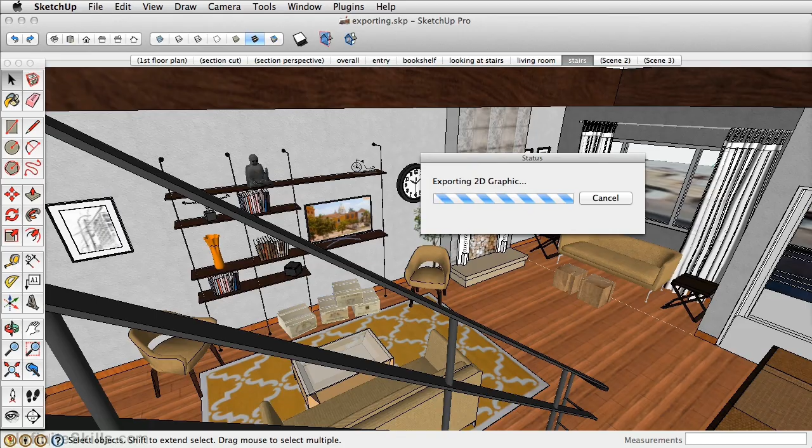The other way that you can export images is by exporting out as a PNG. So instead of JPEG, select PNG and go to Options. This gives you the ability to save out the background as a transparent element. So in Photoshop, this would give the alpha transparency so that you don't have to delete that white fill that you would see in most cases of the background of the image here. Let's just call this front of house.

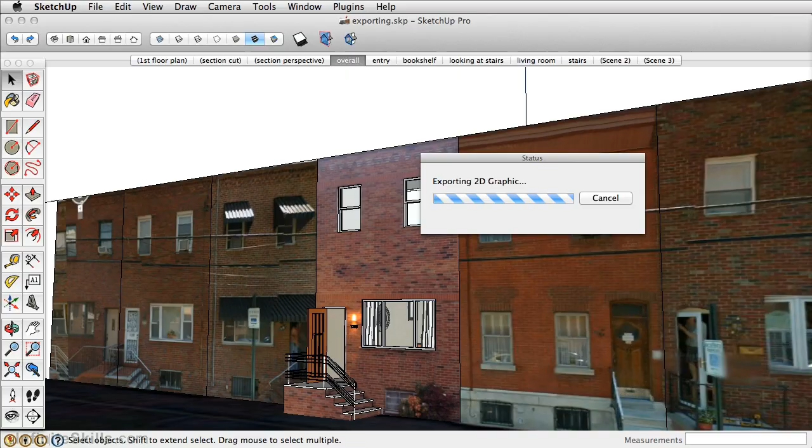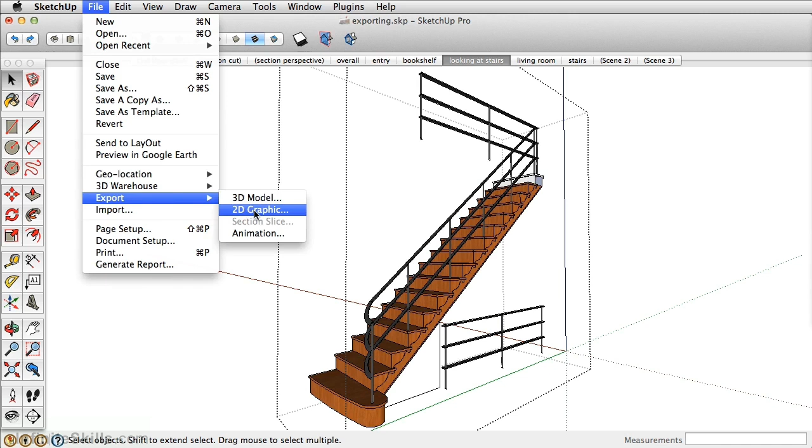One last trick when you're exporting JPEGs. Click on the scene to look at the stairs. And let's double click on our staircase. Now let's say you just want to export the staircase and notice we have Hide Rest of Model activated. Go to File, Export, and save this as an image. Let's call this staircase.

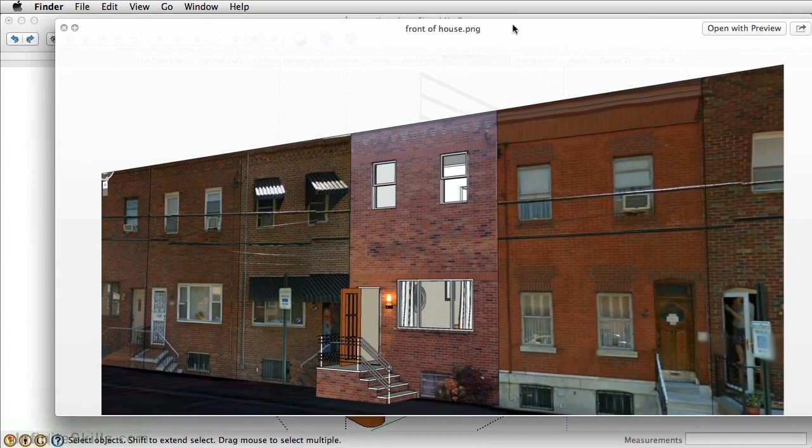So let's take a look at the images in our Finder. So here we have rendering 1. We have the front of house PNG. And you can actually see that alpha transparency because you can see SketchUp running behind the image. And then lastly, just the staircase.

So this is great if you ever just want to call attention to this detail, or if you're creating a composite montage kind of rendering, you can import this in as a separate object in Photoshop and then overlay your different elements. That's pretty much it for exporting images. Let's move on and show you some other exporting options.

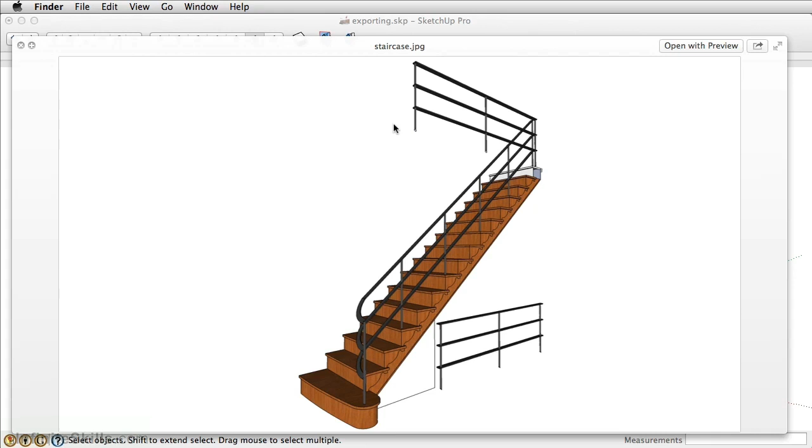We can also export our model as a DWG that we can view in AutoCAD. Let's click on the first floor plan. It's also important to note that this exporting option is for SketchUp Pro only. So this will not work with SketchUp Make, which is the free version of SketchUp.

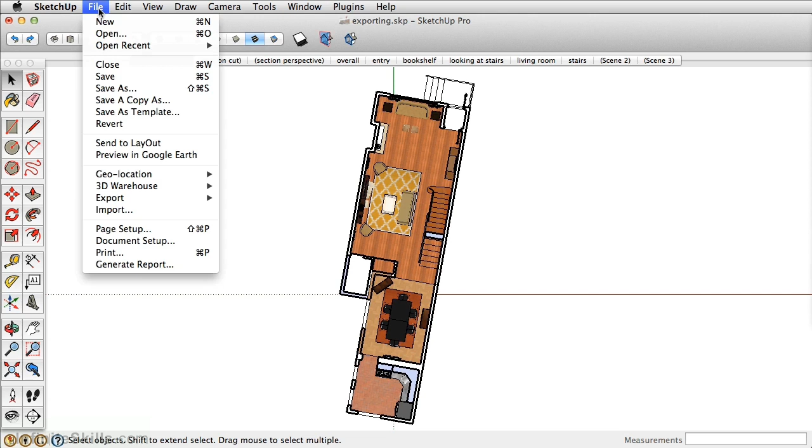What you want to do here is export as a 2D graphic. Set your format as DWG. Make sure you go to Options. And there are various exporting options that you can adjust. For example, if you don't want profile lines to be thick, you can adjust the width of those. You can then click OK. And let's call this Plan.

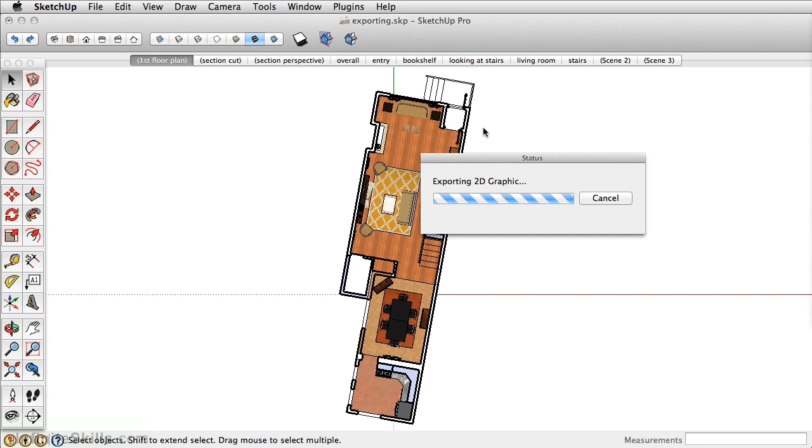And again, it'll run through a status, exporting the model. Should only take a couple seconds depending on how fast your computer is, as well as how complex the 3D model is. You can also export the section cut, and we do that the same way by going to File, Export as a 2D graphic. You can also save just the section slice itself, so this won't save all of the background information within the cut.

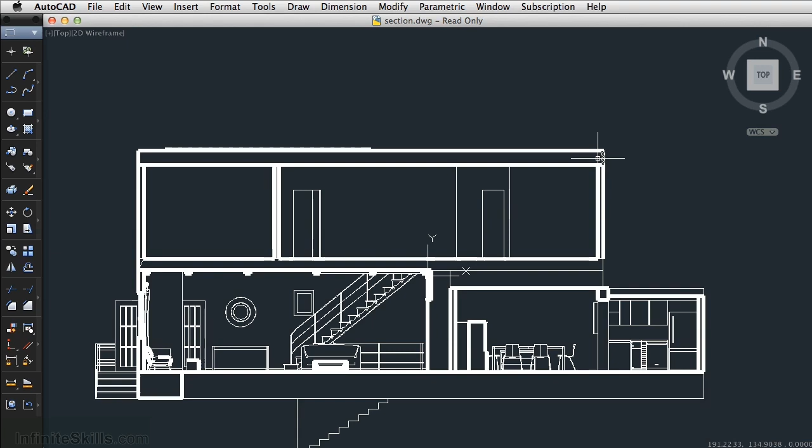We can take a look at what those look like in AutoCAD. So this is exporting out as a DWG, not as a section slice. And then the plan. The last way that you can export an AutoCAD file is by exporting a 3D model. And in this case, you can export it out as a 3D DWG file. And this is good if you're importing, let's say, into Revit, where you can import all of that 3D geometry.

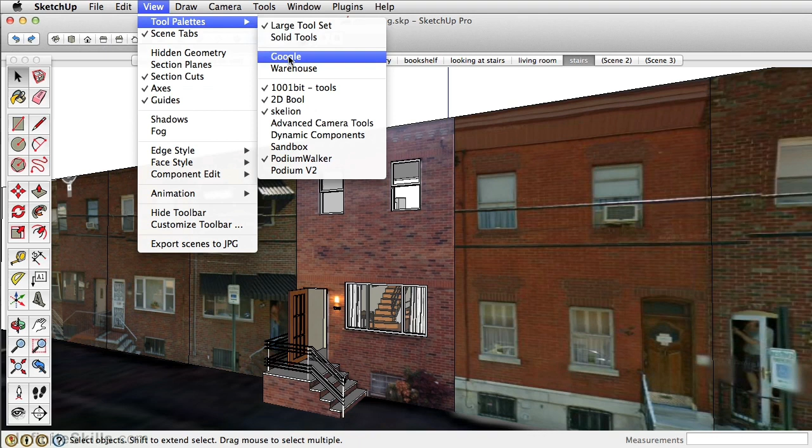In this video, let's export our model as a KMZ file so that we can view it in Google Earth. Now you can export directly into Google Earth. Go to the Google toolbar and then click on this icon right here. That'll create a local file and save it in your temporary places in Google Earth.

Now, previewing it directly from Google Earth is okay, but what we want to do is just export this so that we can send it. And you can do that by going to File, Export, 3D Model, and under File Type, select Google Earth File (.kmz). You can see here we can go to Options. You can actually export hidden geometry and preserve credits.

Just click Export, and now it'll start to export our model. To view it in Google Earth, go ahead and launch Google Earth. You can use the free or pro version of Google Earth. And go to File, Open.

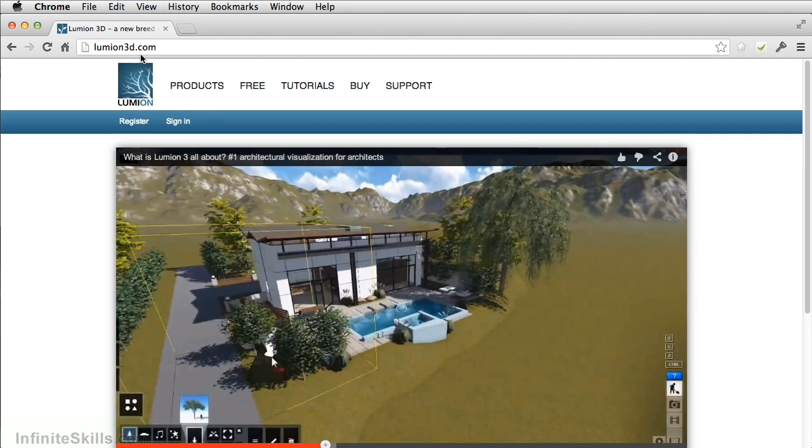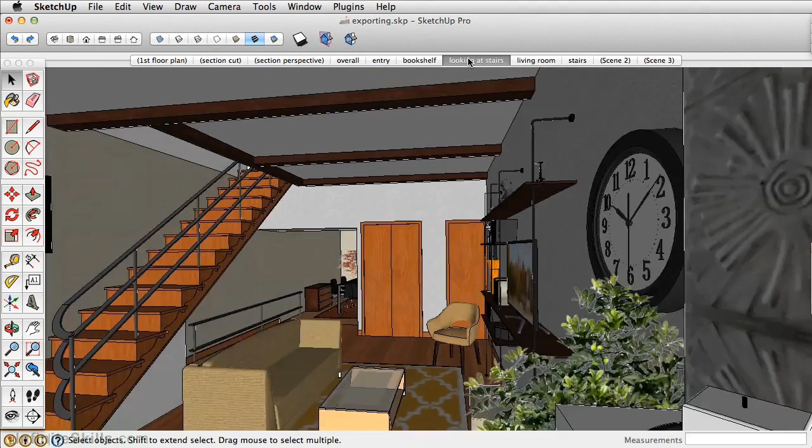Exporting a SketchUp model is pretty simple, but there are a couple tools and tricks that you'll need to learn along the way. First, to export an animation, you need SketchUp Pro. If you don't have SketchUp Pro, you can view your animation just by clicking between your scene transitions. The only drawback to this is you'll have some lag between scenes, and for really complex models, it's just not going to cut it.

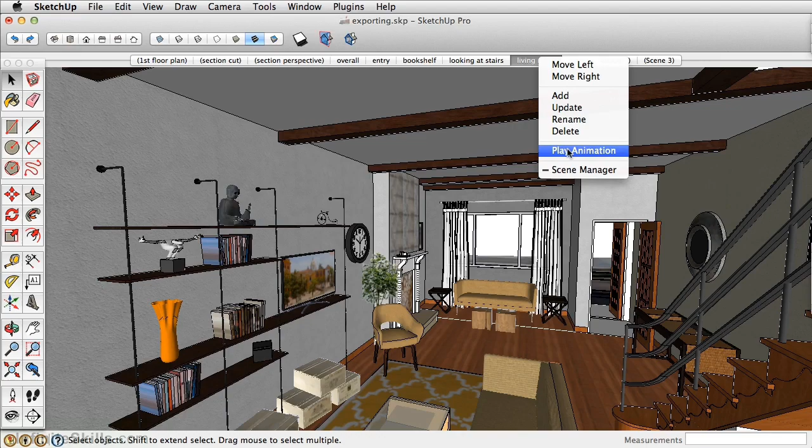Now, as you notice, when I click on the next scene, there's a transition time between each scene. In an animation, there's also a delay or pause time between each scene, and you can see that a little bit better when you right-click on a scene and click Play Animation. To adjust the scene transition time as well as the delay time, you want to go to Window, Model Info.

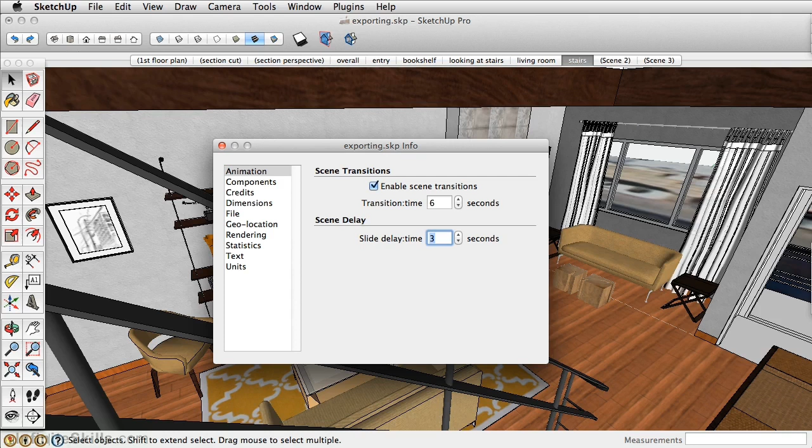Now let's make the transition time 6 seconds. And we want to pause at each scene for approximately 3 seconds. That will really slow down this animation and truly give us a sense of what the space looks and feels like. And it's not moving at a pace that's so fast that we can't really understand everything that's going on.

To export this, just go to File, Export, select Animation. You can set the format. In most cases, I just use this .mp4. However, if you're on a PC, you may see an AVI. That's just as comparable. Go to Options. And here you can set the resolution that you want. I typically like to start at 720p.

You can then set the frame rate. And as a draft, I'll always start at 15 just to see how long the animation will take to finish. You can set it to loop back to the starting scene if you prefer. This is great for sun studies. It'll continually loop. Or maybe if you have an animation that you're showing as a backdrop or as a screensaver, you can always have it loop back to that first scene.

Like with JPEGs, make sure anti-alias is checked on. And simply click OK. And then click Export. You'll see the status screen come up. In the status screen, you'll see the frames that it's rendered and the total number of frames that are in the animation. Lastly, it'll just give you an approximate duration that it'll take for this animation to export. And 14 minutes, that's pretty typical with the computer that I'm running right now.

A lot of the frame renderings really depend on how detailed your geometry is, because it has to pause at each one of those frames, snapshot it, and then move on to the next frame. When it's finished, it'll show up wherever you saved it, and then you can play it from there.